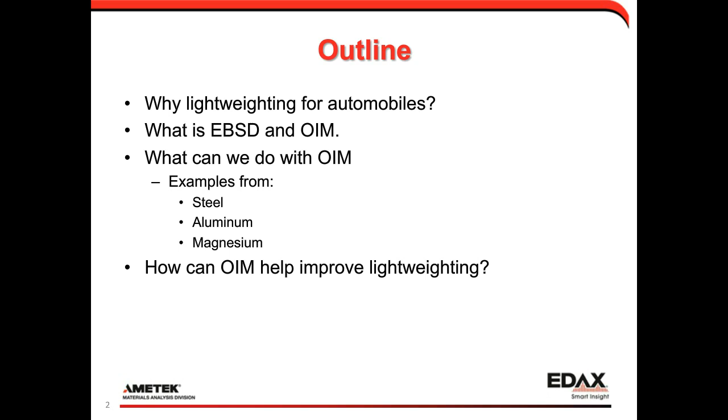So the first question I asked as I started getting into this is why lightweight materials are important for automotive applications. I'm recording this in early 2016, where right now gas prices are actually pretty low, so you don't think quite as much about fuel efficiency when that's the case.

But over the last few years to many decades, there's been a push to improve the fuel efficiency of automobiles, and there are actually legislative mandates in different regions. For the U.S., there's an average fleet efficiency target of about 55 miles per gallon by 2025, a target of 57 miles per gallon in the EU by 2020, and a Chinese target of 47 miles per gallon for 2020 as well.

There are certainly a number of geopolitical factors pushing the automotive industry to improve fuel efficiency, whether it's cost of fuel or global warming and climate change. All those things are driving forces to say it's important to improve the fuel efficiency of a vehicle.

One of the most targeted ways of doing this is reducing the weight of an automobile. A 10% reduction in weight can improve fuel economy by 5 to 8%. If we look at the chart on the bottom right, it shows a number of different possible pathways of improving fuel efficiency, and weight reduction is identified as one of the key approaches that will allow the automotive industry to achieve these aggressive efficiency goals.

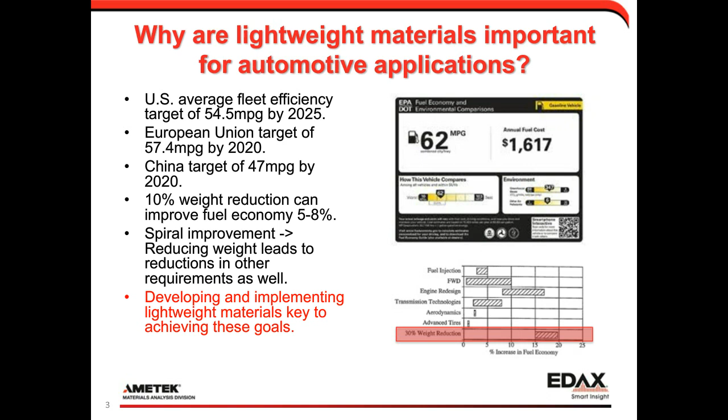When I talk about lightweight materials of interest for EBSD, EBSD is a technique that looks at crystallographic, crystalline materials, so I'm going to talk about lightweight alloys. This chart gives an idea of the strength to density ratio of different materials. The ones targeted for the automotive application are different steel alloys, aluminum alloys, and magnesium alloys, all with different applications within the automotive frame.

Other materials identified are glass and carbon fiber. Those we don't really target with EBSD; I'm going to be talking about the metallic alloys.

When we talk about these materials, what's important is the entire life cycle cost. The material, the manufacturing needed to integrate it into the car body, the life cycle of the material, whether you can recycle it later or reuse it, are all factored in to try to understand if it's cost efficient to use these materials in an automotive application. It's easy enough from a materials point of view to select a material, but in the end, the consumer wants to buy a car at a certain price point, and they have to bring those two together.

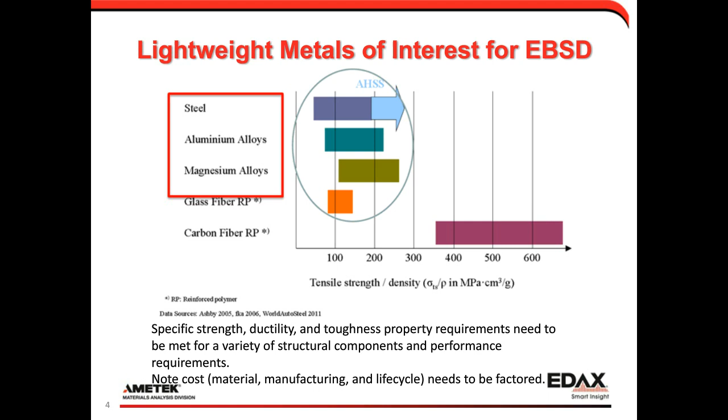As part of this, not only do we have to select a material, we have to be able to fabricate it into a useful shape, form it into a useful shape, and then put them all together. All this has to be done in an integrated fashion to successfully introduce and integrate the materials into an automotive design.

This shows a little schematic. The BIW, or body in white, is the structural frame of a car, and it shows where different materials can be integrated together. It shows some different aluminum produced by sheet and die casting and extrusions, some different steels, and some magnesium, all brought together in a way to minimize the weight but meet all of their requirements, both from a weight and from a performance and safety perspective.

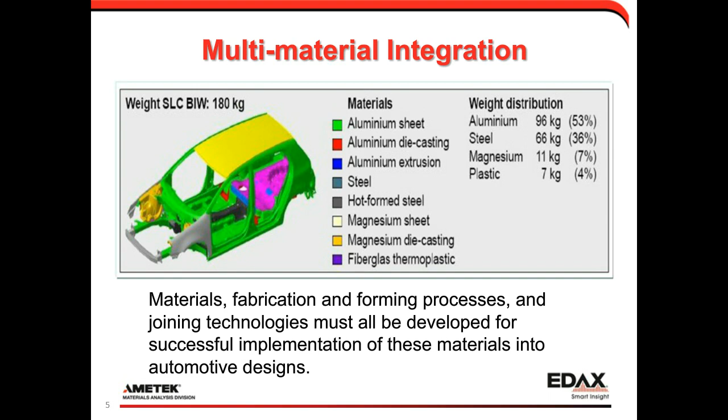Looking into this, a lot of times as different companies are moving forward along this roadmap to lightweighting, there are different stages of lightweight material implementation that are planned and expected. As the materials are introduced, the technology and expertise to use these materials are developed going forward.

This is just a little example from a Toyota concept. You have a baseline vehicle here. There's a high development car, which introduces more advanced materials and goes to a lower weight, but it takes more research, learning and development to achieve. But there's also a lower development stepping stone where more available materials and processing are currently available, so you can step your way along to using these materials.

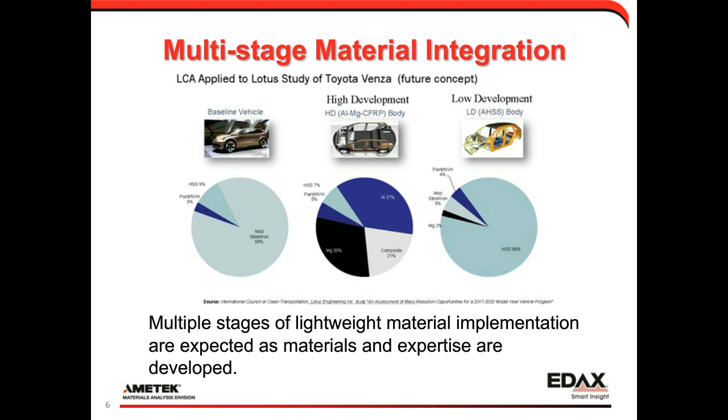And then when we talk about each little component of the car, they all have their different specific requirements, different requirements in terms of weight, processing, and also material properties.

This was a neat example I saw of what's called a fuel tank guard. They came up with an idea of creating this with a hot stamp processing route. You can break this up into mechanical processing, thermal processing, and then what's happening with the microstructure during this processing. As they do this hot stamping, they take the material, heat it up, press it, and then it cools back down in the shape you want.

As you do that, the steel microstructure develops through that thermomechanical processing procedure, and it's that final microstructure that actually gives you your material properties. In this example, through developing this procedure, they came up with a material that was 7% lighter, 40% fewer parts, and almost 90% less welding than the baseline part used previously.

But as they do this, you need to make sure your final result has the right microstructure. So what we need to be able to do is measure that microstructure to help correlate that with any process development.

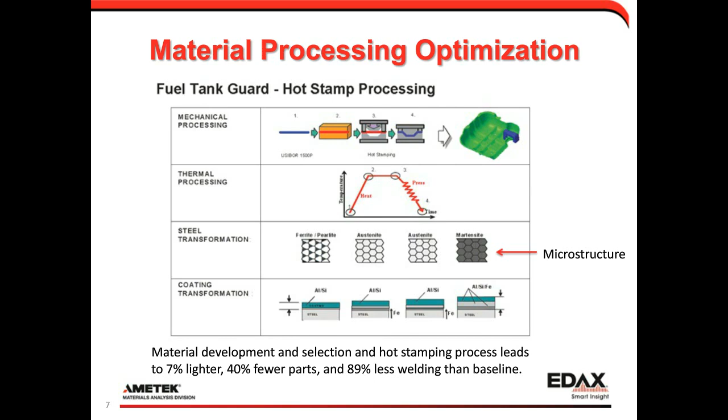The approach I'm going to talk about today is what we call OIM, or Orientation Imaging Microscopy, which falls into that classical material science idea that your materials processing will define your microstructure, and microstructure defines your properties. So as you adjust your processing to get different properties, you're essentially altering the microstructure. By better characterizing the microstructure, you get a better understanding of the relationship between the processing and the final properties via the microstructural constituent measurements.

As you push to minimize weight and optimize properties, you want to know: if I go to a higher temperature, if I cool at a faster rate, what is that actually doing? Because then you can come to more of a fundamental understanding, saying if I want this property, I really want this microstructure - how do I get it?

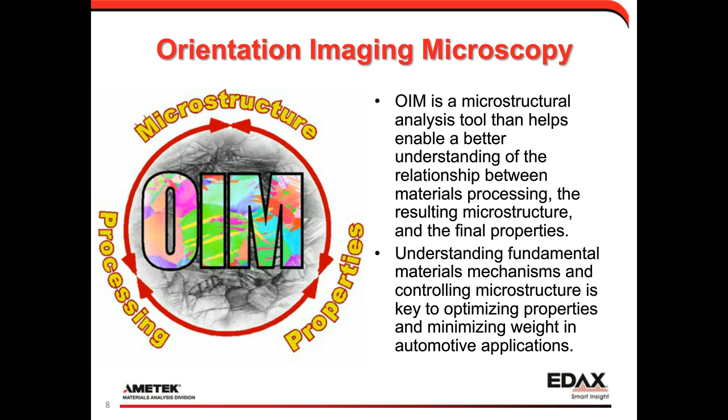OIM and EBSD really tie into the crystallographic aspect of materials. Most materials are generally anisotropic, and by that I mean they vary with orientation.

That same concept can apply on a crystallographic scale, where some orientations will be stronger, some orientations will be weaker, and different properties will vary in different directions.

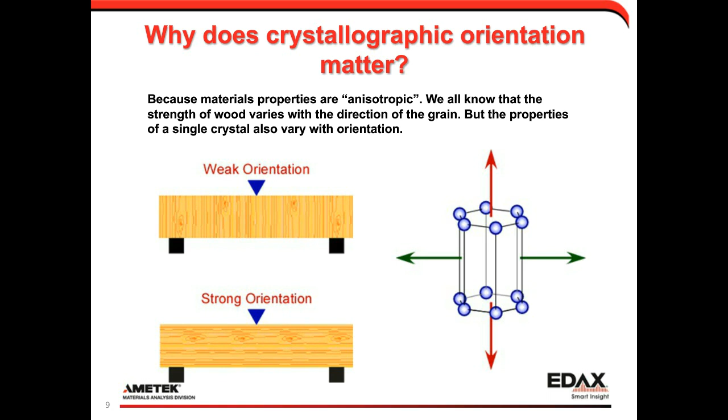Now often when you first start learning about this, it's assumed that you get enough grains together, pointing in enough different directions, and the anisotropy is averaged out and becomes isotropic. This isn't really always true - most forming and fabrication processes will introduce some amount of anisotropy into your final material.

And so being able to measure this is important. You can use stuff like neutron diffraction to measure a volume, or X-ray to measure an area. But with EBSD and electron diffraction, we can go to very point-specific sampling. And what I'm going to try to do is show some advantages of this approach.

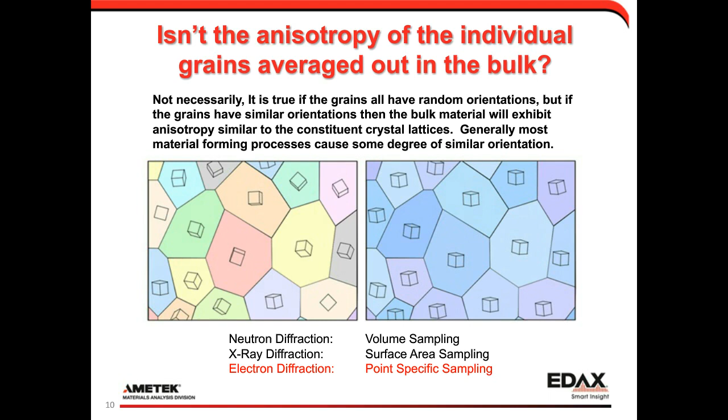The way to think about OIM, or orientation imaging microscopy, is automated EBSD or automated EBSD mapping. EBSD is an SEM-based characterization technique.

Those bands correspond to different crystallographic planes. By knowing the spatial distribution of those planes, we can calculate the crystal orientation and the crystal phase present at each point. Once we have that, we can start to visualize the microstructure by coloring different points via different metrics, be it orientation or phase. I want to show some examples of that.

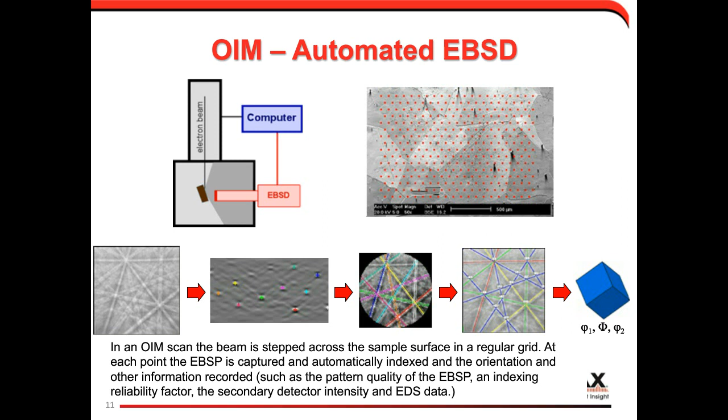This occurs through the formation of deformation twins. As a material is strained, it causes these twins, which increases grain boundary density and blocks further dislocation movement. So the question is, how can EBSD help understand TWIP steel development and performance?

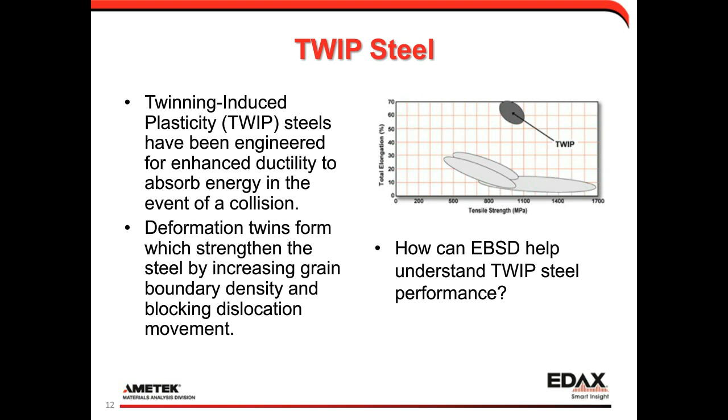What I'm going to start with is this evolving chart, titled "What We Can Do with EBSD." On the left, we'll put what type of analysis we can do and what tools we have for interpreting the data. The first thing I've put here is diffraction-based defect imaging, with mapping as a visualization tool.

The first measurement I want to talk about is EBSD image quality, or IQ. This is a value that measures the sharpness and intensity of the diffraction bands in the EBSD pattern. In a recrystallized part of the material where the crystallographic lattice is very pristine, we get nice sharp diffraction points. If the material is deformed, the lattice is a little curved, and the diffraction becomes more diffuse, not as sharp, not as bright, causing a lower image quality value.

What we can do is measure an area and map out these image quality values, where the lowest points are the darkest and the brightest points correspond to the highest image quality values. I've called this a defect-based type of image, kind of similar to dark field imaging.

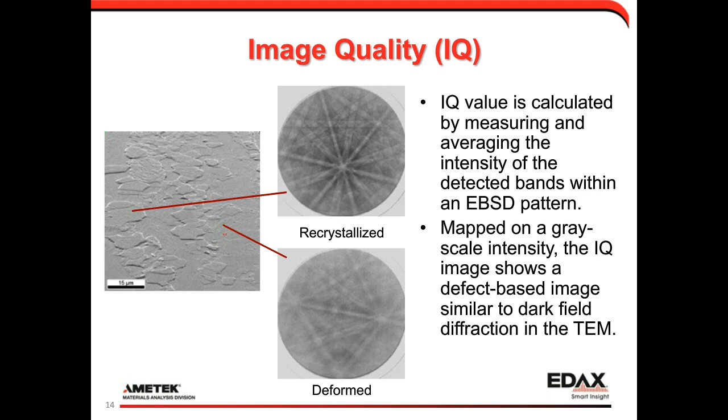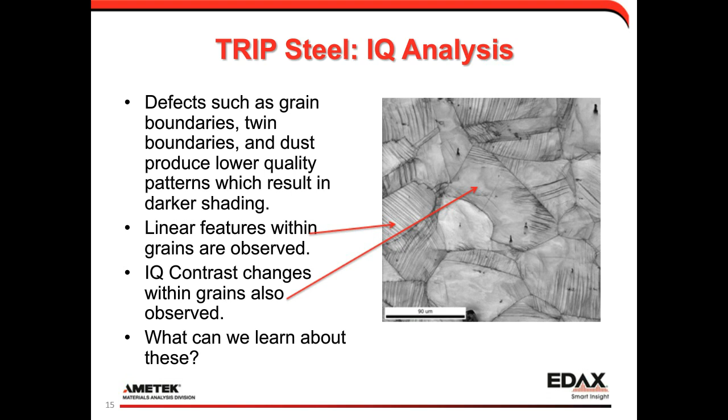The next thing here, based on imaging, is we can go to measuring the crystal orientation. As far as a tool, we also have the ability of doing point and click type of analysis.

To show an example, what we do is go into specific grains, click different areas, and display the local crystal orientation by showing a little unit cell on the microstructure. It's important to note that EBSD measures the complete three-dimensional orientation of each point, which is why we can show the unit cell.

We term this type of point-and-click analysis interactive analysis, and we have a full interactive toolbar for this sort of approach.

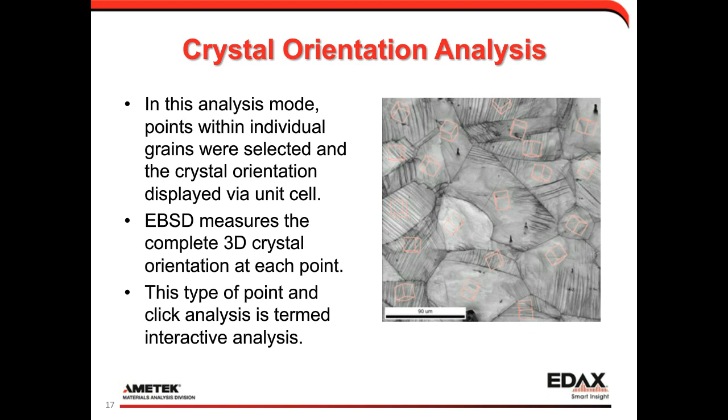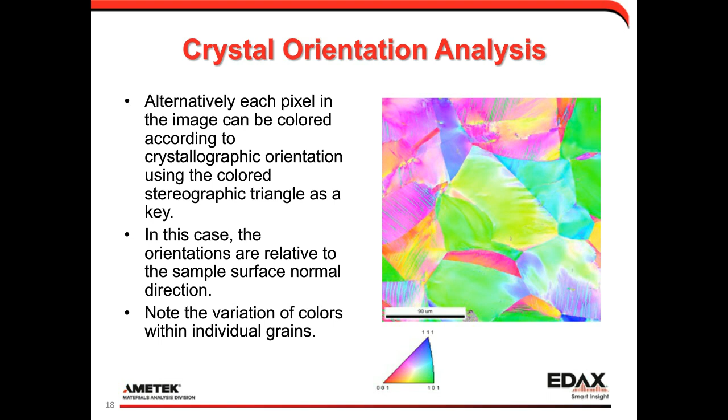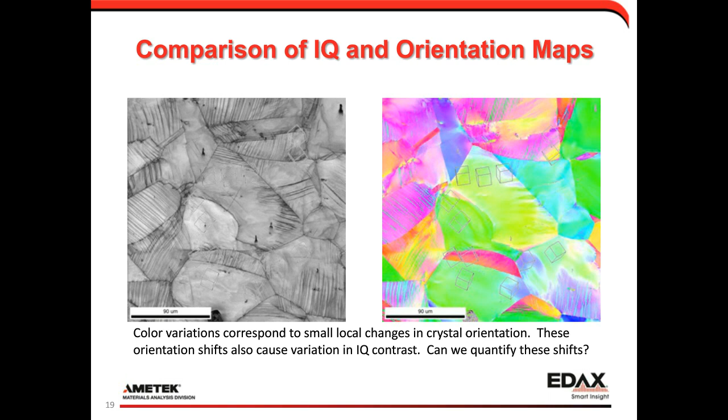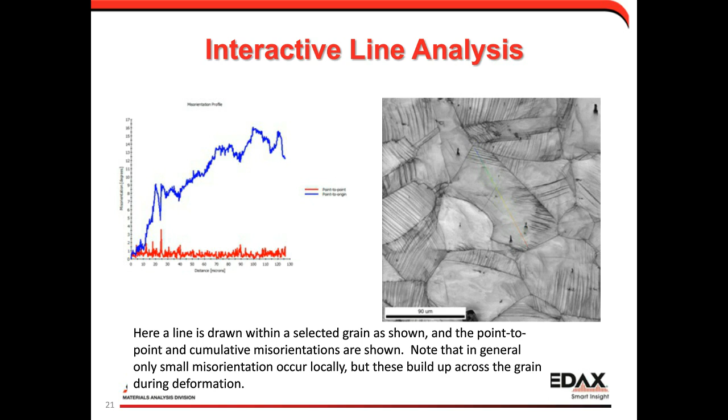So once we're measuring those small misorientations within a grain, we can start to think about quantifying plastic strain measurement. Plastic strain is what happens when we permanently deform a material past the elastic limit. And so we start to introduce dislocations that cause small lattice changes of misorientation. So we can measure that with EBSD, and we can do it with a point, kernel, or grain-based analysis.

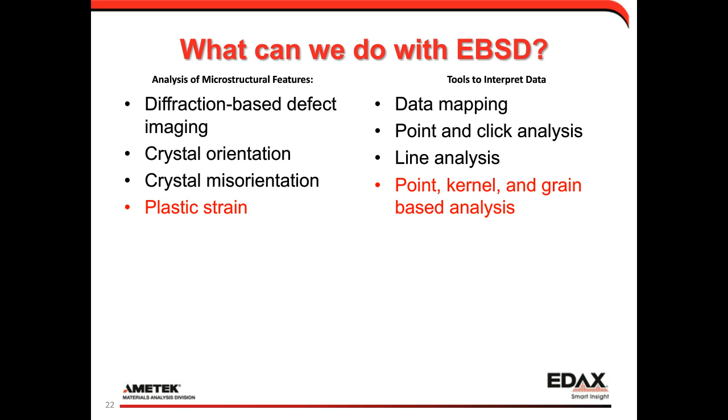So there can be quite a bit of bending present in some of these grains, but we can visualize where this plastic deformation occurs. We can see where it is relative to different grain boundaries or triple junctions within the microstructure.

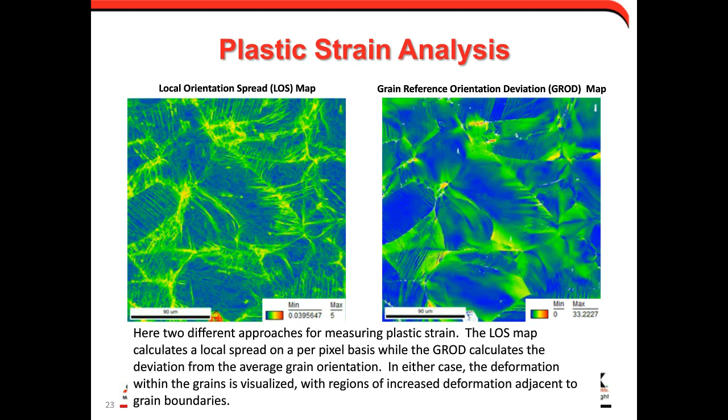And that leads to the idea of grain boundary analysis. Not every grain boundary has the same type of influence on material properties. So we're able to look and see what type of boundaries occur in a material.

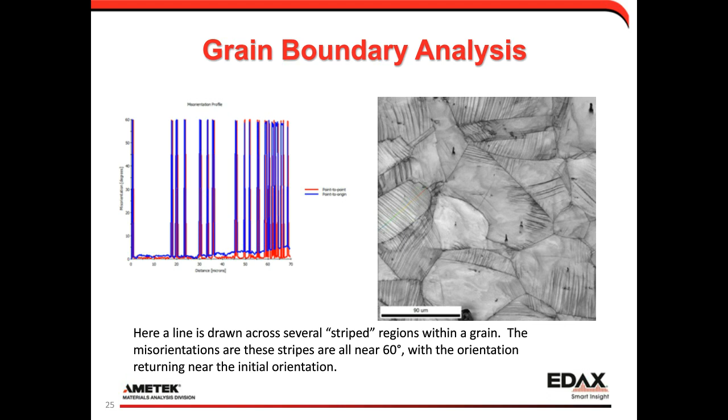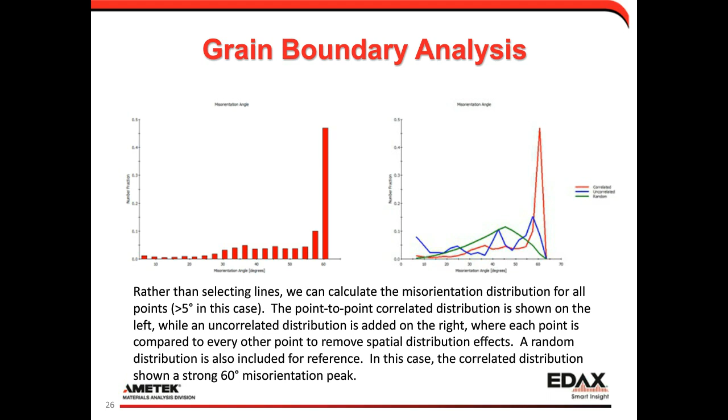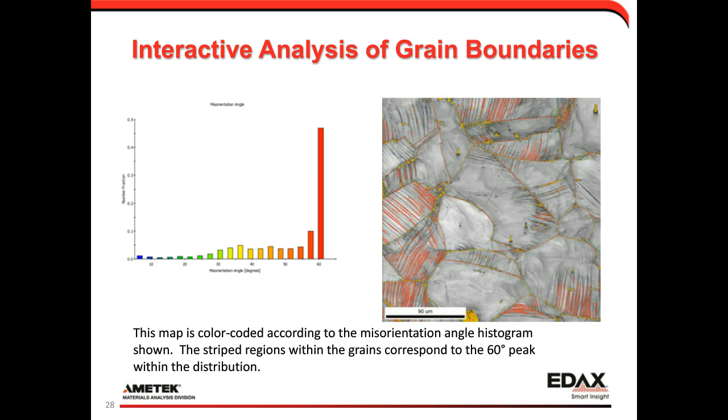That leads to the idea that those striped parallel boundaries, of course, make us think of twin boundaries. So we can actually do some twin boundary analysis with EBSD and OIM.

Twins are boundaries with very specific misorientation geometrical relationships that can be described in what's called CSL, or coincident site lattice theory. Primary twin boundaries are termed sigma-3 CSL boundaries. If you take a grain and you twin it, you'll get that sigma-3 CSL relationship. If you twin it again, you'll get 3 to the n, or in this case 3 squared, or sigma-9 second-order twin. So what we're able to do is classify all the boundaries in there, to say whether they're low-angle boundaries, in this case 2 to 15 degrees, high-angle boundaries greater than 15, or CSL boundaries.

And so then these are twin boundaries. We can see that there's a pretty high fraction of CSL boundaries present in the material. It makes sense, it's a TWIP steel with lots of twins, we'd expect lots of CSL boundaries. We can also classify those as different types of CSL. So we see there are primarily sigma-3 boundaries, but there are a few second-order sigma-9 boundaries in the distribution as well.

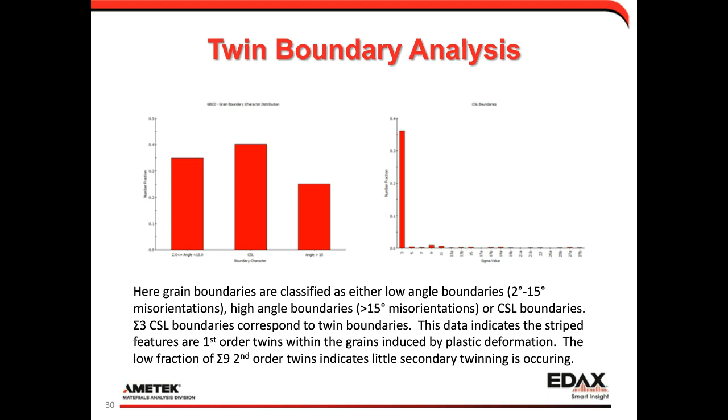The next thing we can do is talk about grain size measurements. We can combine that with the idea of measuring grain sizes with and without twins, and twin removal from grains. So to measure the grain size, what we need to do is group together pixels of the same orientation. To calculate grains, we need to group together points that have the same orientation.

But to do that, we have to define some sort of grain tolerance angle to decide when one grain changes from one to another. In this case, I've used 5 degrees as our grain tolerance angle. So we go pixel by pixel in the measurements and say if the misorientation between those 2 pixels is less than 5 degrees, it's going to be within the same grain, and if it's greater than 5 degrees, it's a different grain. As we repeat that process for the whole measurement grid on the left, we determine the grains, and then we randomly color these to show the size and morphology of the structure. You can see the grain structure, and a number of the fine lamella twins in a number of the grains.

But as we go through this grain grouping approach, the other thing we can do is say if the misorientation matches a specific relationship, so in this case a twin relationship, which would be a 60-degree rotation about a 1-1-1 crystallographic axis for the primary sigma-3 twin, we'll take that specific type of boundary and ignore it when calculating our grains. When we do that, we get a different grain structure shown on the right where we see our grains with the twins excluded, and our effective grain size is much larger than if we include the twins.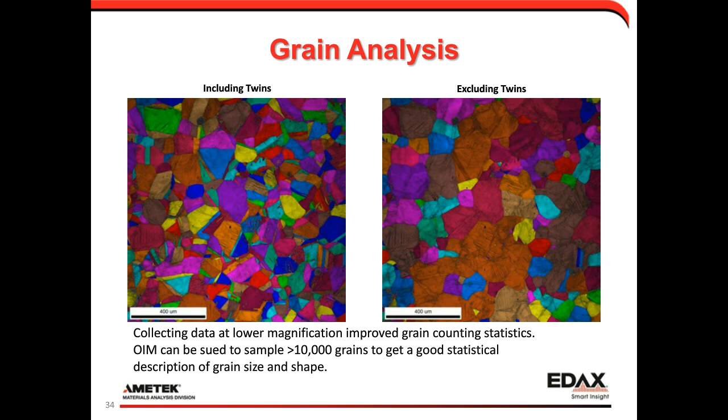So we can conclude this section by saying, how does EBSD help us with TWIP steel? Well, EBSD can be used to measure the twin boundary fractions, the local deformation, and the grain size, which can help us understand the microstructural influence on improving the strength and ductility of the materials.

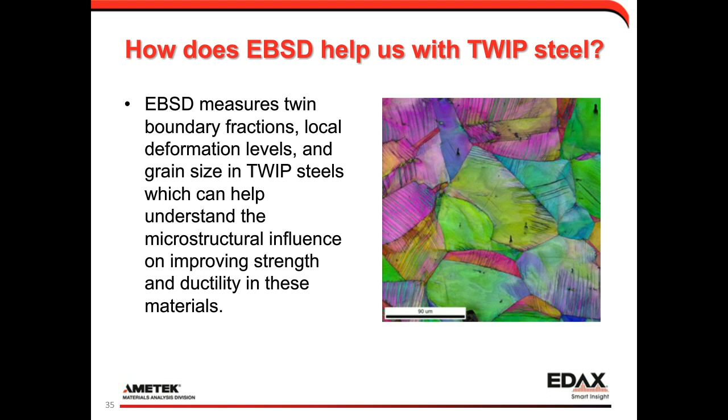So at this point, I wanted to take a quick moment to talk about grain size. This is a great quote from an article in Materials Today a few years ago, where it says it's well known that grain size is the major microstructural parameter in dictating the properties of a polycrystalline material.

These are two different equations. The one on the left is your Hall-Petch relationship, which gives an idea of how the yield stress is influenced by the average grain size. The one on the right gives an idea of the steady-state strain rate, where grain size is a parameter. By knowing the grain size, we can correlate that to a lot of different material properties, and EBSD is a nice tool for measuring that.

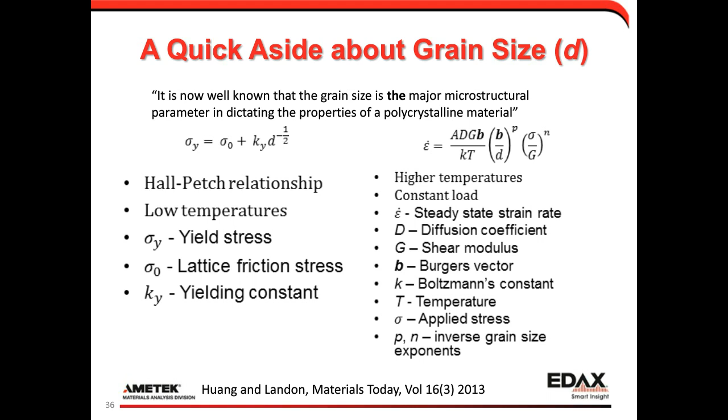I mentioned earlier that we define a grain tolerance angle, and EBSD is a great tool for looking at grains under different grain tolerance angles. There's a great question of what number defines a grain. I don't know if there's a great answer, but EBSD and OIM is a great tool for looking at that.

This is a really nice example. The image on the top left shows an image quality map, which to me reminds me of a TEM-type image where we see a lot of grain boundary contrast in the material. The image on the bottom left shows an orientation map, where the colors show orientations. We see that this material seems to have a lot of what I'd almost call a subcell-type structure.

When we create the grains, we randomly color them. If we do a grain tolerance angle of 10 degrees, shown in the middle left, that measurement area is really broken up into 3 primary blocks of grains: a top, a middle, and a bottom. If we define the grains at 1 degree, the top block stays about the same, even though there's lots of grain or boundary contrast in the image quality map. But the middle and bottom grains start to section down into little subgrain, subcell-type structures. And if we go as low as half a degree, now that top grain breaks into different structures.

So a lot of times, measuring a grain size will depend on how that grain boundary is influencing the property of interest, for deciding which of these would be appropriate for trying to model in an equation.

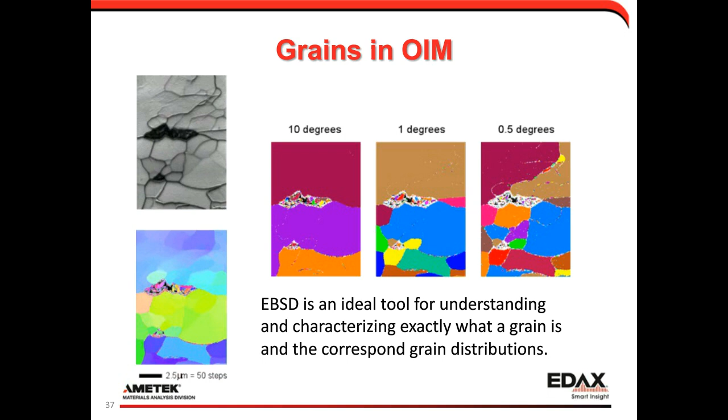And this is just an example here. One of the things research is focused on is using different methods of introducing superplastic deformation to refine and control the grain size. This is called equal channel angular pressing, or extrusion, where basically you push a material through a die that takes a strong turn.

In this case, it's 90 degrees. Your pressed sample comes out with the same cross-sectional area, but the microstructure can be significantly influenced and varied depending on the number of passes and the route. So you can push it through, then turn it 90 degrees and push it through again, and there are different routes that go through that way.

You can see this is an example from aluminum, from that same Materials Today article. The unprocessed structure, shown on the top middle, has very large traditional grains. When it goes through different passes, we see very different microstructures that evolve. EBSD is a great tool for showing those as a function of processing route.

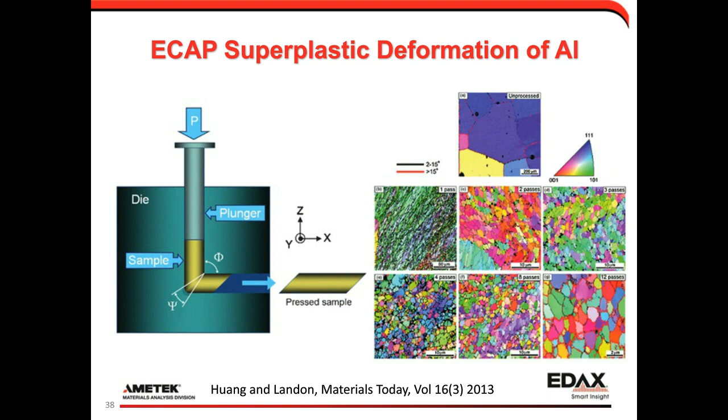So that was aluminum. Superplastic deformation is one way of influencing aluminum properties. Aluminum is used in a wide range of different applications: your powertrain, your chassis, your body-in-white, also your engine components. Aluminum has the formability necessary to produce some complex shapes economically, but it's important to note the crystallographic texture of aluminum and aluminum sheet will strongly influence this formability. Being able to join aluminum components is also an important aspect in terms of the total manufacturing process.

This chart shows the miles per gallon improvement from introducing different materials. We can see that aluminum sheet can get pretty significant improvements in miles per gallon at a relatively efficient price point.

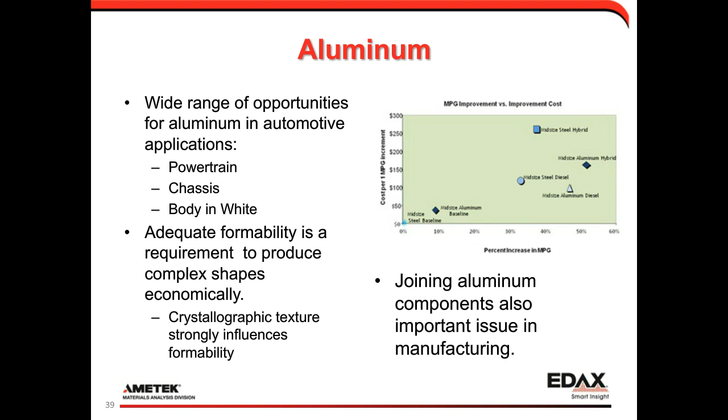So when we start to do EBSD with this, again building along this chart, one of the first things I wanted to show is large area analysis.

So this is just an example from an aluminum friction stir weld. This is a solid-state joining technique that reduces the time and energy necessary to join aluminum together. In this case, this is EBSD data collected from a 27 millimeter by 7 millimeter area with a 10 micron step size spatial resolution to image the texture, orientation, and microstructure of this friction stir weld. You can see the base material on the left and right-hand side, and then we see the weld nugget there in the middle, which has this onion ring type of pattern of different layers of grains. But we can get a large area view of the microstructure.

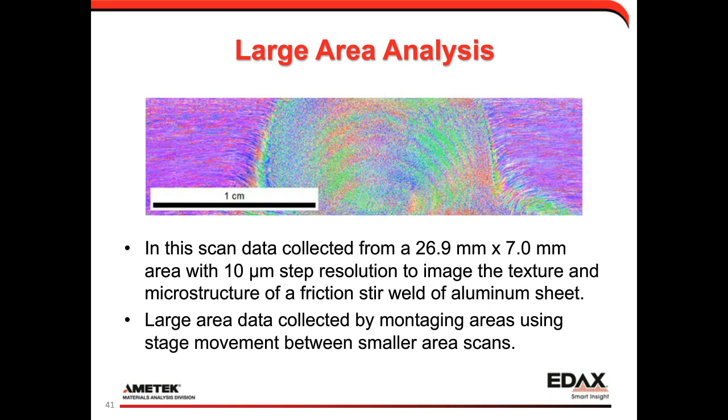So I highlighted friction stir weld. Honda used friction stir welding for welding of dissimilar metals in the 2013 Accord, and that was important because that's a mass-produced automobile. These welds are as strong or stronger than conventional MIG welds, resulting in 25% body weight reduction and 50% less energy. So it's very appealing from a total perspective.

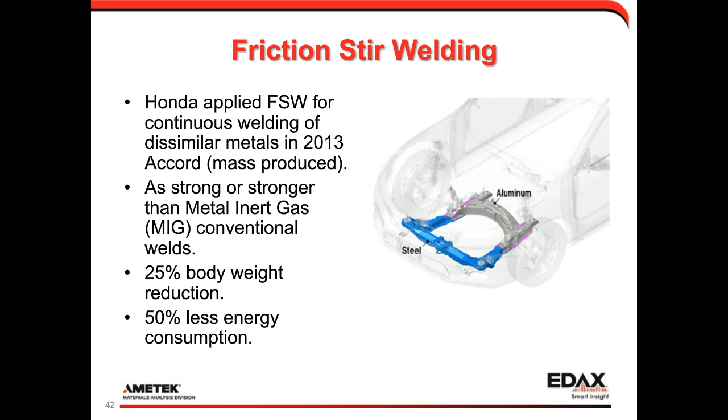Friction stir welding was developed a lot in aerospace applications, but it's finding applications in the automotive world. This is just an example. I put a more modern, more developed friction stir weld to show the orientation map on the left, so the base metal transitions much more quickly into the heat-affected zone of the material. We also can use that local orientation spread map to see the amount of deformation present at the weld interface in the weld.

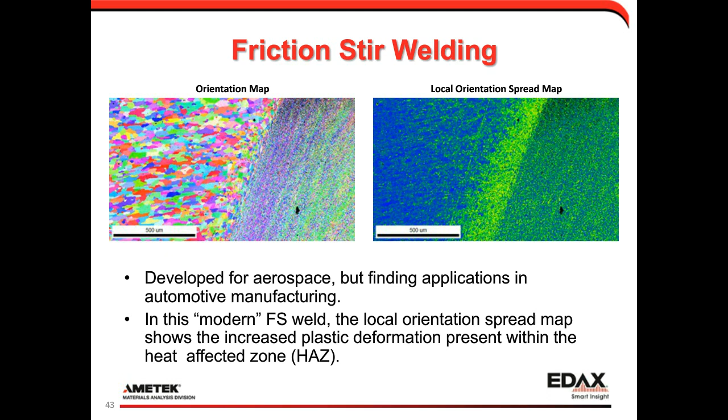And of course, from these large area maps, we can also go to the idea of data cropping and merging to be able to play with these larger data sets. So this is just an example of taking that large friction stir weld area and defining different areas to create a subset using a cropping function. We can crop out a single area or multiple areas, and then add these to the project for easy analysis in comparison to the large area.

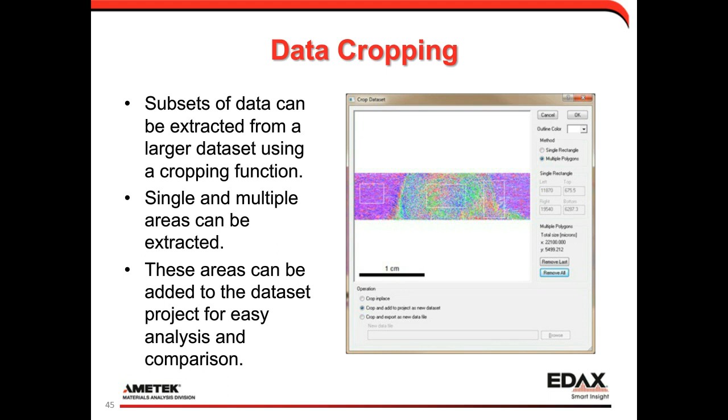So this is just an extraction right at the heat affected zone here. On the left we have the base material and the grains that are bending into the weld. The right shows the grain map, so we can see there are some long grains there, and then some smaller, more equiaxed grains in the structure. So the question is, how can we analyze this particular area of the weld a little bit more in detail?

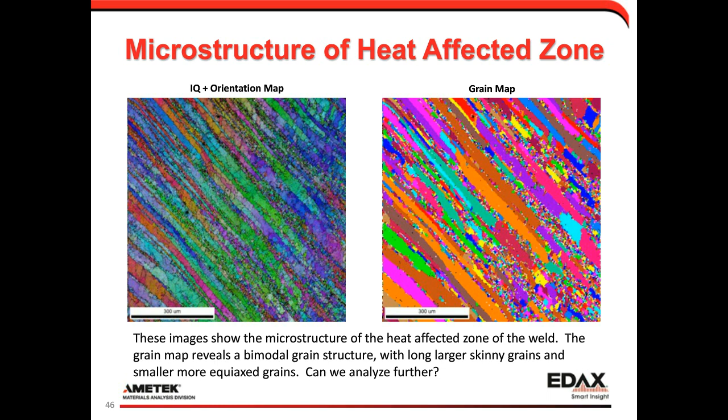That leads to the idea of what we call data partitioning, or taking a subset of the total data set and performing analysis just on that subset to glean information from a specific component of the microstructure.

So here what we've done is we've drawn a grain size distribution on the left, and then applied interactively a color code across that grain size distribution. The small grains are blue, then go into yellows and up to reds as the grain size gets larger. We can apply that color scale to the map to see the spatial distribution of the grain sizes in the image on the right. So we see the small blue grains, and the large, non-equiaxed, more elongated red grains bending from the top left down towards the bottom right.

So here now what I've done is I can go into the software and adjust my color scale. Rather than going across a complete color spectrum, I've just gone blue to red to make a two-phase or two-categorical distinction between grain sizes. So I've said if it's less than 50 microns, I'm going to shade them blue, if it's greater than 50 microns, I'm going to shade them red, and apply that color scale. So I've differentiated by a 50 micron selection.

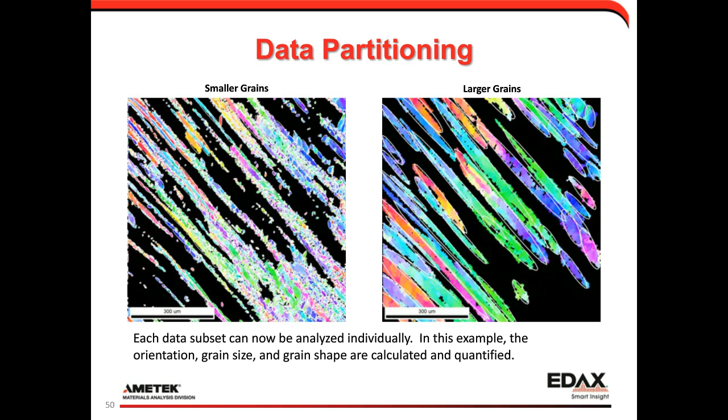One advantage of EBSD is we get spatially specific data. If we compare measurements with XRD, which will measure some of the same information from an area, what we lose is that spatially specific data, and we gain that with EBSD.

The reason that's important is that the spatial distribution of these measurements can influence performance. This is just an idea: these are two sections from different areas of an aluminum extrusion. We look at the orientation map on the left from the center, and from the edge of the extrusion on the right, you can see they have two strong extrusion components.

There's a blue 111 component and a red 100 component. We look at the right, it has a similar red-blue distribution. The area fractions of both are actually pretty similar as well, but we can see the spatial distribution is quite different. There are much larger clusters of a given orientation towards the center than there are towards the edge. So if you were to measure this total area with XRD, you wouldn't be able to tell there's a difference between these. And if you look at grain size and texture, you don't see a difference. It's only by seeing the spatial distributions that these become more obvious.

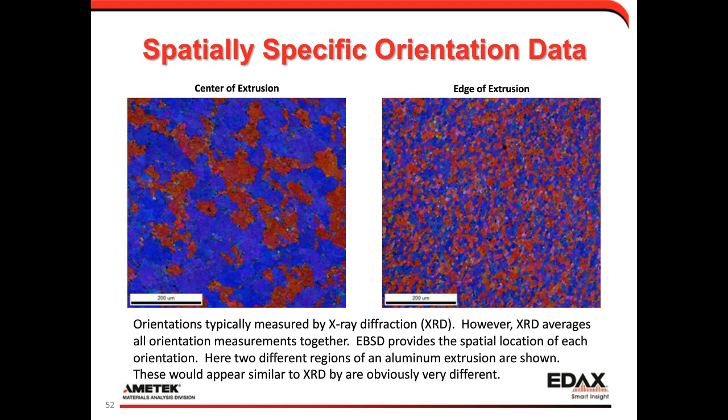So this is just a quick summary for aluminum. How does it help us with aluminum for characterization - we can measure the orientation, grain size, and shape within different regions of a friction stir weld. That would allow us to adjust the welding parameters to produce an optimized microstructure with the properties you want from the weld.

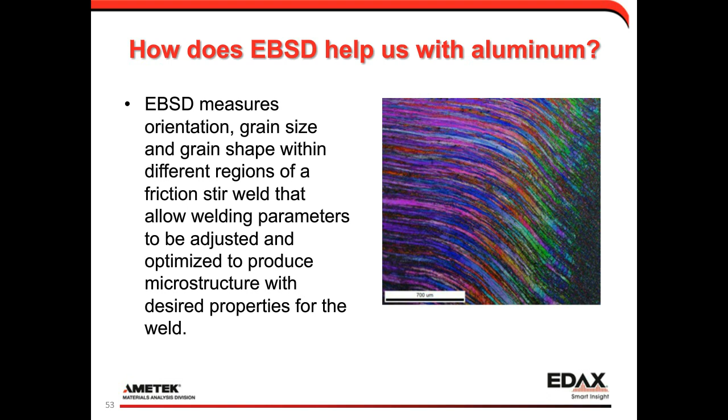The third material alloy I want to talk about is magnesium. Magnesium is attractive because it's lighter than aluminum and steel, so it's desirable. It has the mechanical properties you want. But magnesium is hexagonal close packed - a hexagonal crystal structure, which is inherently more anisotropic than aluminum or steel, which are both cubic. With that, magnesium will have fewer slip systems available, which affects the formability. Being able to understand and control the anisotropy is really a key factor for being able to implement and integrate magnesium into an automotive application.

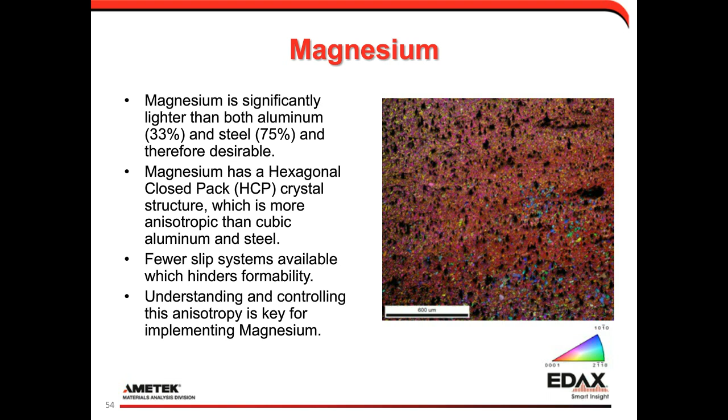One of the things we can talk about is texture analysis or preferred orientation analysis.

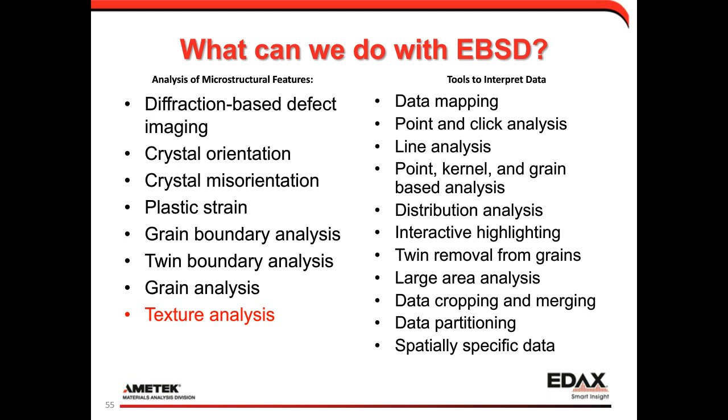As a quick review, I'm going to show what we call a pole figure. A pole figure shows the distribution of a given crystallographic plane relative to a physical sample surface. In this case, we often talk about the normal direction of a sample, which is the direction coming out of the sample surface. But we can also have in our measurement frame an RD, a reference or rolling direction, or a transverse direction which is orthogonal to that. If you imagine your right-hand rule, your normal is often your thumb, your RD is often your index finger pointing down the direction of tilt, and your transverse direction is 90 degrees to both of those.

And so when we show a pole figure, we look at the distribution of a specific crystallographic pole. In this little schematic, we're showing the 100 faces of a cube. We put the cube in the center of our measurement reference frame. We show where those poles are on the surface of a sphere, but then we take that three-dimensional sphere and convert it to a two-dimensional projection to show as a pole figure. So we see where those poles are located in sample space. We can look at the top hemisphere, the bottom hemisphere. But with magnesium, we're going to generally look at the 0001 or the basal pole distribution.

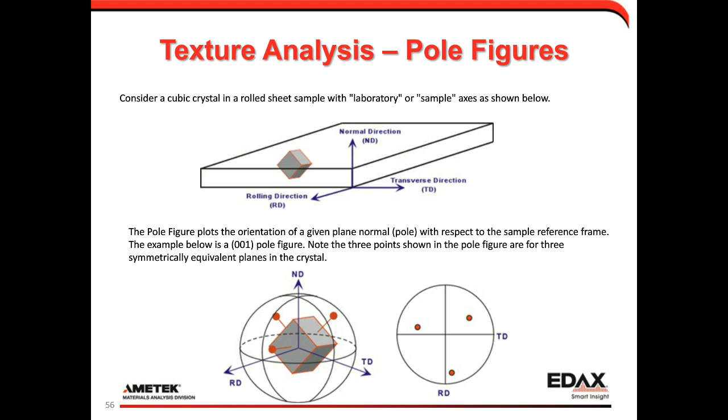So if we look at that here, this just shows a little schematic. We're interested in the 001 pole. If we have it in that frame, the pole will be pointing straight out. There are other planes that would be possible, but we'll focus on that basal projection.

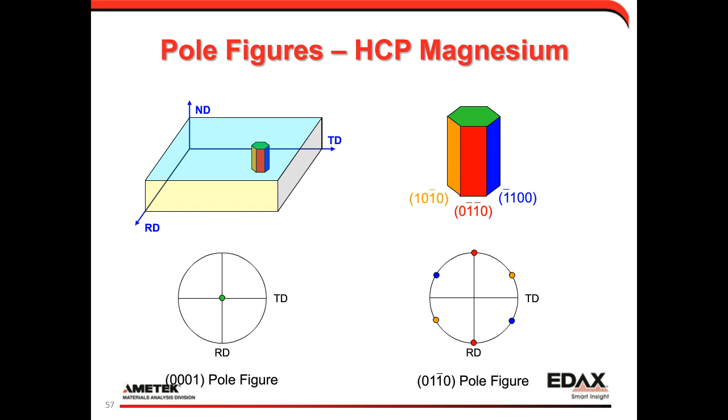This is an example from a piece of wrought magnesium alloy. It generally has this strong basal texture, and we can see that sure enough we do see a strong basal texture, but it's sort of skewed - it has sort of an upside-down comma-shaped distribution to it. So the question is, can we learn anything from that sort of asymmetrical distribution of the pole?

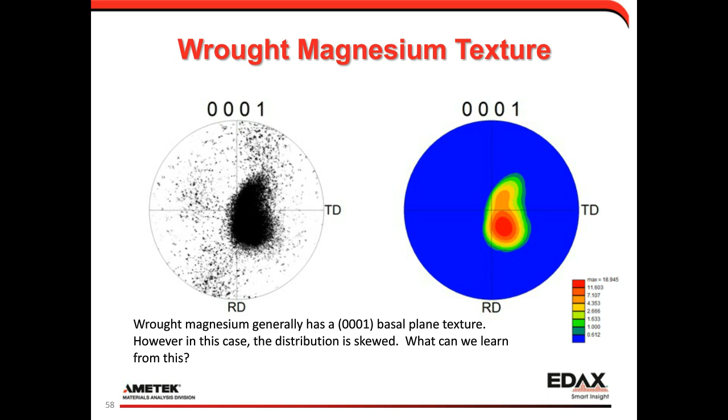So what we can do is interactively analyze this pole figure. I'm going to click on the center of the distribution and specify a 20-degree angular tolerance range from that, then apply the blue to red color scale, the default, and show that on top of an image quality map on the right. We can see that the center of that distribution corresponds to the top 75% of the measurement, so something happens spatially where at the bottom this skews a little bit.

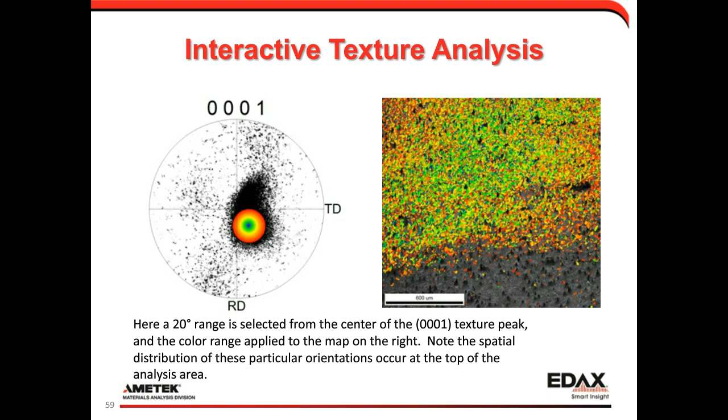Now what I've done is selected a single color for both, and clicked on a point to show a red distribution and then a blue distribution. We see a strong texture that's developed, and then it's shifted into a little bit different area in terms of this part of the wrought alloy component. So clearly we have an inhomogeneous microstructural distribution that we've identified by analyzing the asymmetry of that pole figure.

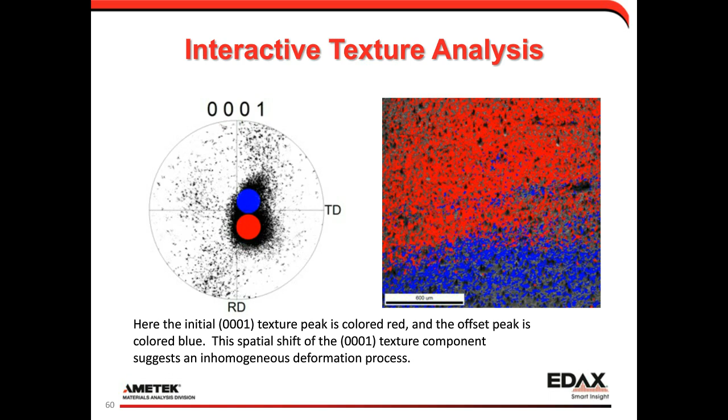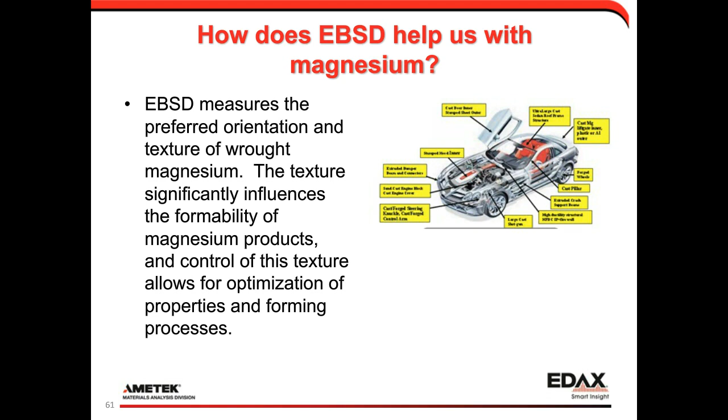So that's a summary of how EBSD and OIM can be used in different ways to show different ways we can measure microstructure on these sorts of lightweight structural materials for automotive applications.

I think the important part is if you're going to try to push the improvement of optimized strength and optimized ductility for these applications through texture engineering, EBSD is really the ideal tool for measuring the texture. You can't really engineer texture if you don't measure it. So EBSD is key for being able to optimize these alloys for these applications.

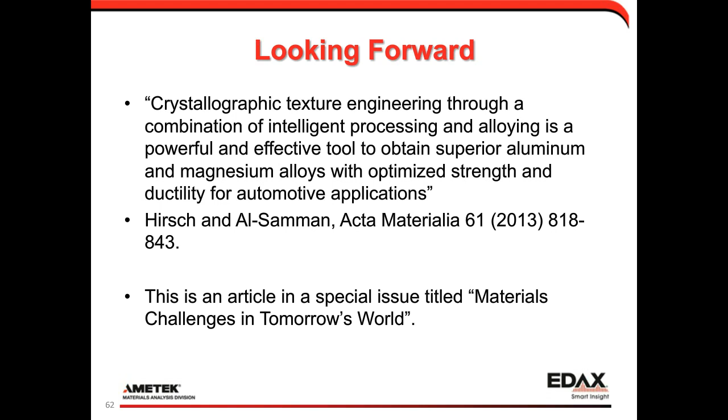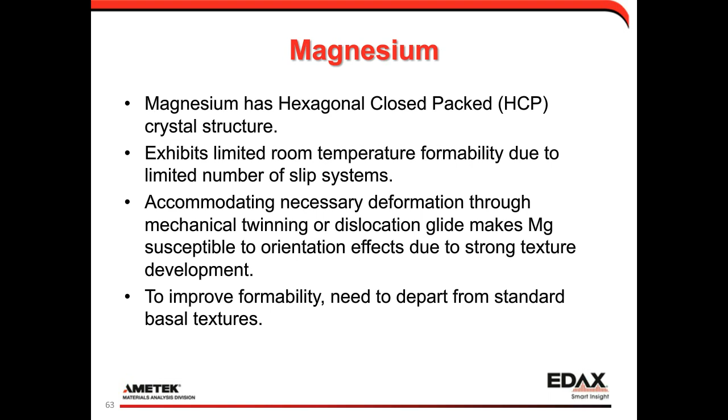So what we want to do is use EBSD to measure the homogeneity, the phase distribution, the grain size, and the texture, as well as whatever plastic deformation and twinning occurs.

Texture engineering will aim to improve formability by getting favorable alignment of the basal planes with the deformation direction. Then by refining the grain size, we can activate additional deformation mechanisms such as grain boundary sliding, which improves formability.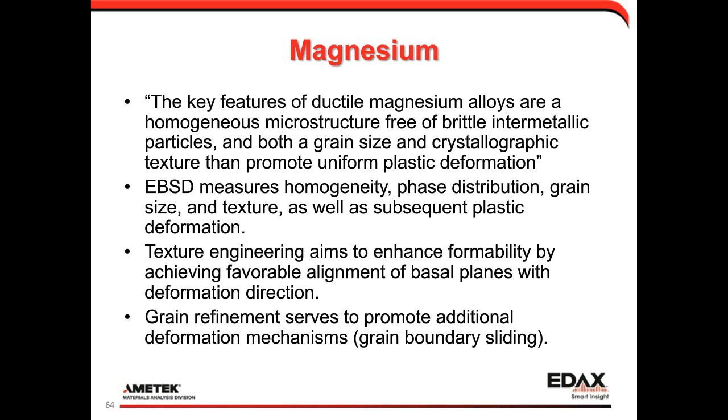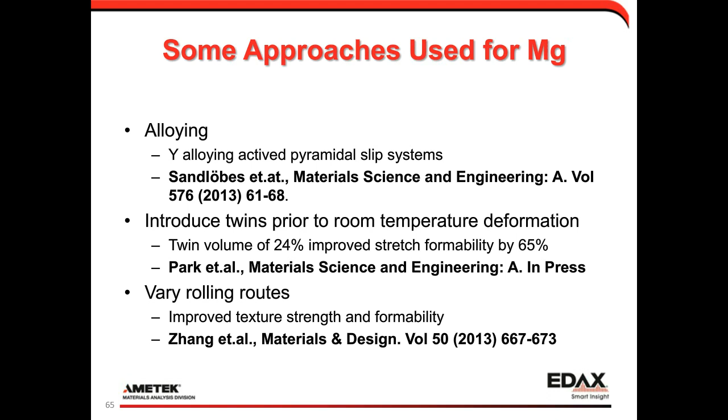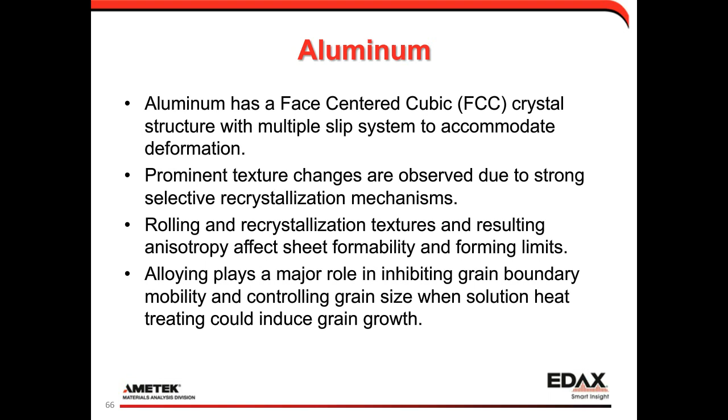So to wrap it up in summary, EBSD is a powerful microstructural characterization tool that gives us information about crystal orientation, grain size and shape, grain boundary character, twinning character, crystallographic texture, preferred orientation, and phase distribution, as well as plastic deformation. This information is useful for helping to develop materials, processing routes, and forming routes that allow us to implement different lightweight materials into automotive and aerospace applications. Once we've integrated these lightweight materials, the cost efficiency and fuel efficiency of the final vehicles will improve and meet the requirements of the automotive industry.